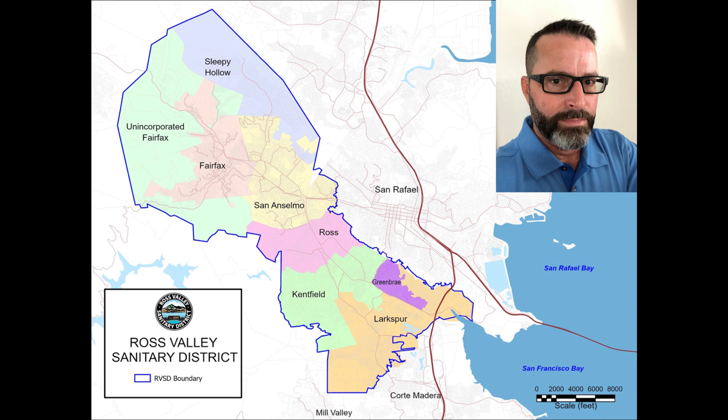It's crazy weather as it is, but nonetheless, I want to talk a little bit about our system. We have about 194 miles of gravity sewer, about 15,000 EDUs, and about 200 miles of private lateral.

We're not in charge of the private laterals, but we have enforcement programs that take care of that. Most of our pipe is 6 inches or smaller. We still have a series of 4-inch main line. About 73% of what we have is 6-inch, a lot of that's still VCP, but we're steadily moving towards upgrading and upsizing all that to 8-inch.

We have about 40% of our pipes in easements, and our terrain is challenging. We're in a valley with steep hills on both sides, and they've built homes right at the side of each mountain. So we have a lot of elevation changes, which makes both design and access quite difficult for the manholes and the pipes. Then we have about 5,200 manholes or rod holes. That's the makeup of our system.

Most of it was built 50-plus years ago, with still a large percentage that's 100 years old or older. We're one of the oldest sanitary districts in California, though not the oldest. I believe we were established in 1899, something like that.

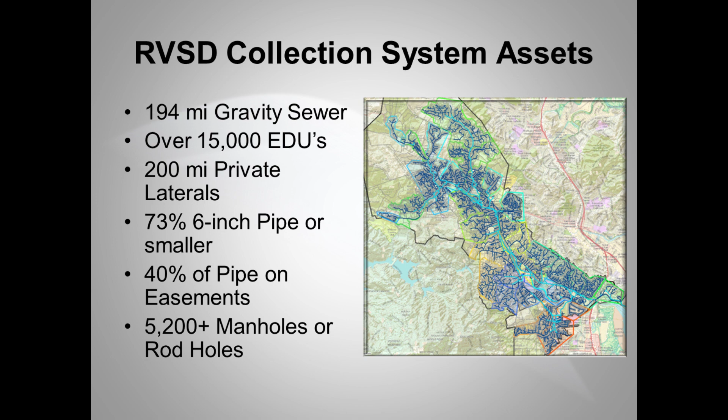Our story is, when I came to the district, we had quite a few challenges. For the longest time, the infrastructure was neglected. They weren't doing a lot other than fixing things as they came. It wasn't by design, but they were certainly running a run-to-fail model. This was adopted for most of our existence.

As things would break, you'd respond. We had crews going out doing night calls on a regular basis. We had problems in the pipes, the manholes, the pump stations, the lift stations—just about everything was falling apart at one point or another.

We have the badge of having some of the most overflows in Marin County, and probably in the North Bay area. Our count of overflows is up, our volume of overflows is up. We suffer from incredibly high I&I levels. Our factor on a normal storm is a factor of 10. On 100-year storms, we're at factors closer to 15, and even 20 in some of our basins. We're getting a lot of I&I coming into the system.

We had some management plans or design plans, but much was not being followed. None of our information was digital, it was all on paper. All of our maps were in books, and we would take stickers and move them from one place to another, depending on what kind of work we were trying to do in terms of O&M management or any type of work order tickets.

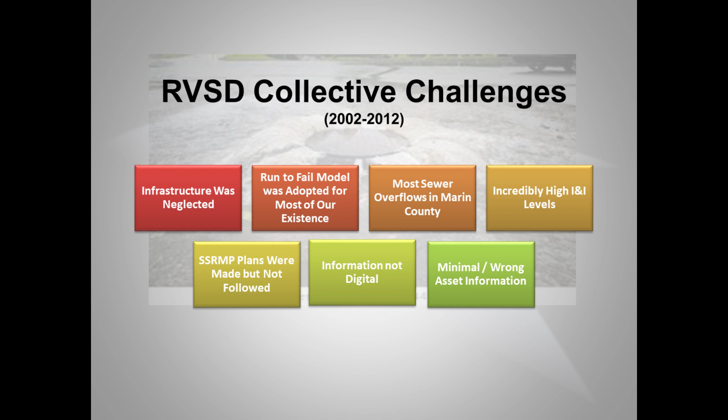When we would go do repair, it was based on gut—someone would say, I think we need to go fix this pipe because we've had a few SSOs in this pipe. This, of course, resulted in bigger problems.

This was a turning point in the district. We had a lot of attention—we made, I believe, national news for this, let alone regional news. We started to get a lot of attention on what the agency was doing, or in this case, not doing. This event was in 2010.

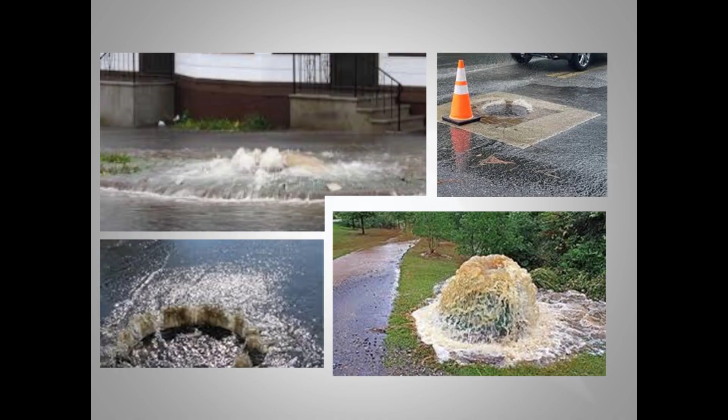I came in 2011 as part of a pack of workers that were brought in to help shore up not just technology, but to help develop how we were going to go about exploring and finding out where these problems were. And as the year continued, we wound up with quite a few more SSOs.

Or spills nowadays, we call them in California. Some are small, some are big, of various different sizes, and we had a lot of them.

So what we started to do, and the first step of any good program, is you have to know what you have. You have to know where it's at, where it lives, and what the condition is. And that's the big focus of today: our condition assessment program.

We started from scratch. We started televising the system. We started televising the manholes. We started recording information. We captured all that data, and we pushed that all out through the NASSCO system. We'll have some slides on that later.

But we use a coded standard so that we have the ability to measure one pipe from another year over year and get the same expected results. And that helps drive our capital planning.

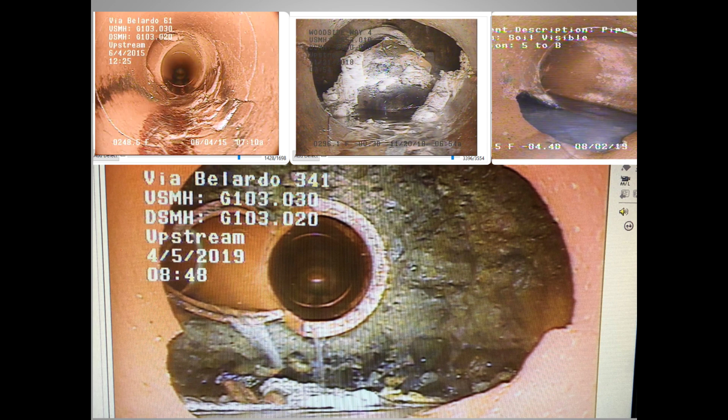About a third of those had some grade 5 level defect or another in those pipes. And they weren't just breaks like we saw in the top left-hand corner here. We had big gaps in our pipes. We had sections of pipes that were missing. We had connections that were broken. We struggled quite a bit with blockages and infrastructure.

There was also, at the same time, a big push by PG&E, our power company, to do cross-bore work, and they were boring water mains as well as gas lines through our system on a regular basis. The bottom left one was an electric, big 10 kV power line that was driven through our stuff. Not only did we not know where our assets were, they did not know where our assets were either, so they were just out performing work and they ran into us.

So we had several of these occasions. Lots of maintenance problems, lots of roots, lots of degradation of the system. We had collapses in the system. We had concrete peeling off the walls that was no longer adhering to the rebar anymore.

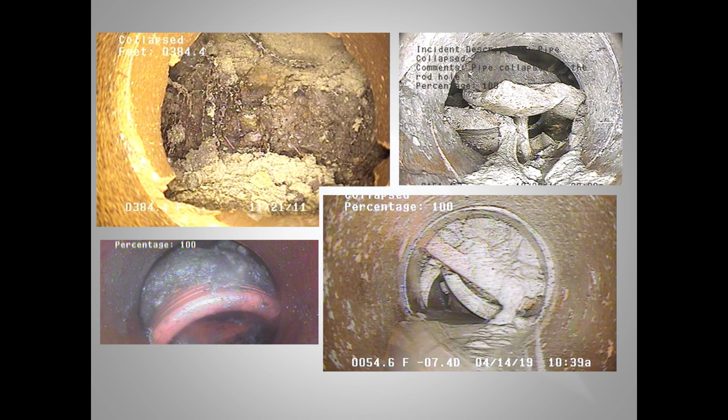And ultimately, what came of this... excuse me, my slide didn't advance. In 2013, we were visited by the Water Board, which is a state regulatory agency in the state of California. And they came and gave us a cease and desist order, which basically says it's time for you to start taking care of your system, otherwise the state would get involved and start managing the system for the agency. This is not a good look for any agency anywhere in the country.

But what this did is it forced the agency's hand. Now, in terms of my perspective, we were doing everything we could with the resources that we had. What we lacked was more resources to go out and take care of problems. We lacked capital funding. We lacked infrastructure funding. We lacked just maintenance and upgrade funding.

They had us running on a shoestring, and the board of directors simply refused to raise rates and address the problem because they wanted this region to be as affordable as it possibly could. Now, I agree with affordability, but the nearsightedness of this led to an agency that was unmanageable, unwieldy. We had way too many overflows, way too many problems with our system.

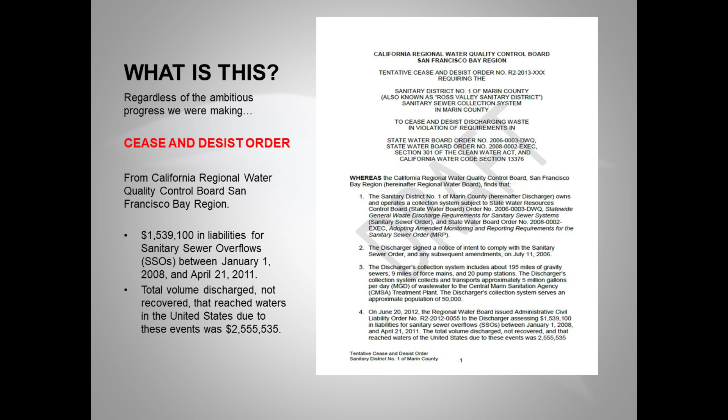And so they came and addressed that problem, and this forced the agency to start dealing with funding. It helped us really establish our asset management plan, or system, that we still use today. That starts with good inventory, and asset inventory is number one. You have to know what you have, where it's at, and then what the condition is.

From that, we can define what the levels of priorities are. We do that through an evaluation process. We use risk asset management, we use risk models. We have models for the pipes, we have models for the manholes, we have models for our vertical assets like our pump stations.

And we have everything put together in a manner where it becomes defendable. So when we develop a plan for rehabilitation and replacement, this also affects our regular day-to-day maintenance activities. We want to be able to defend our actions and activities so that when something fails, we can refer back to our plan and say, yep, we understand we missed one, but we had 3 other systems ahead of that were in much worse shape.

And this is the heart of good asset management: being able to understand where you're at and what you're trying to accomplish. And you have to present that in a way that ratepayers understand it, as well as the stakeholders and everybody involved. In this case, the Water Board is our biggest stakeholder that's involved.

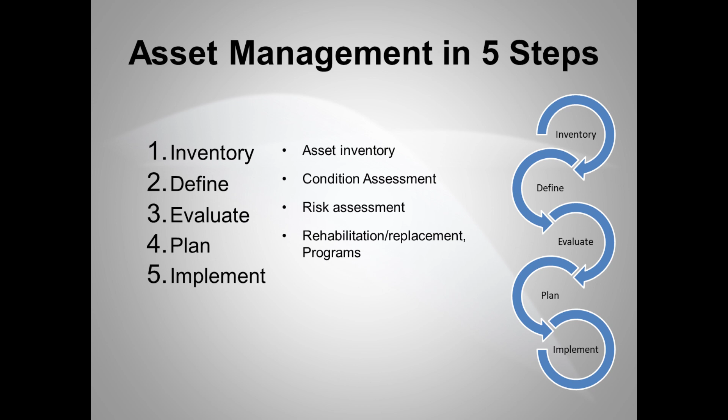And that has made a huge difference, and that has been fiscally responsible. We didn't obviously have that money, we had to raise rates. We bonded, and all that is done through good asset management and good program management in order to get us to this point.

We have quite a few lift stations that were bad, quite a few manholes that were bad. We had everything from brick falling out, full delamination of the concrete, rot - so we started inspecting our manholes as well. I think we just about have them all inspected now. We have 4,800 manholes and about 4,400 inspections in the system.

Some of the ones that aren't inspected are those real hard to get ones. We actually have some manholes that are under buildings or inside of buildings that you have to open the hatch door in someone's kitchen in order to get to. No joke - those still exist in our system.

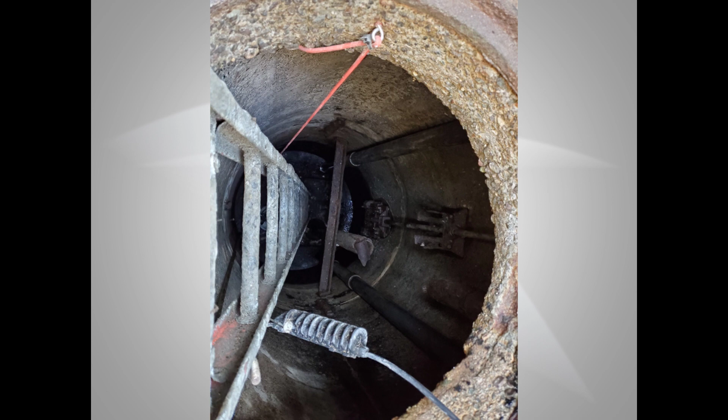But as we looked at the corrosion going on in our system, we started looking for methods and technologies to deal with this, because even though $100 million is a lot of money, it's not enough to do everything. We would need billions of dollars to replace everything that we have in our system. So we started looking for technology that gives us the biggest bang for the buck in our infrastructure rehabilitation. One of the systems that we found works really well for us in terms of increasing the life of existing lift stations and manholes is we coat them.

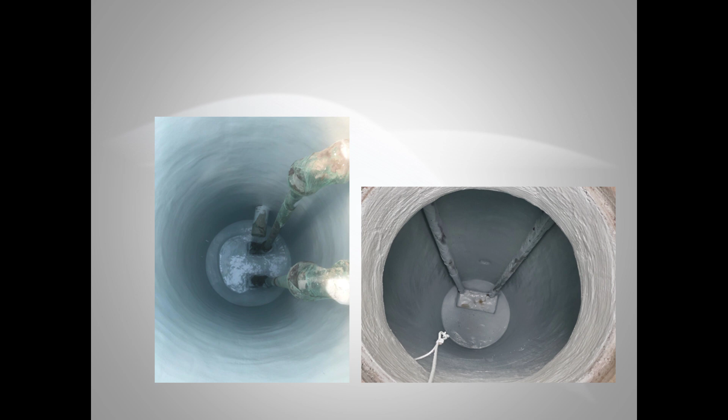We go in and have those sprayed, and we have the cementitious applied. We chose to go with an epoxy on top of it, which is why we like the Madewell product - we found that it outlasts everything that we do. We've done it all - we've done the insert liners, we've done just the cementitious by itself, and we find that the epoxy lining outlasts it by far.

There's about 150 manholes we're looking at now that have already been coated once with just cementitious, and we find that they're already starting to wear out again. This is in our low-lying areas that suffer from a lot of H2S damage, and we're going to have to go in, clean them up, and reline them again - but this time we'll come back with the epoxy on top, and we'll get the same life.

So we've got some assets that Horatio did for us years ago, and other than the staining on the walls, they look just as good today as they did the day we put them in. We see no evidence of that asset becoming an issue for us, and that's our goal.

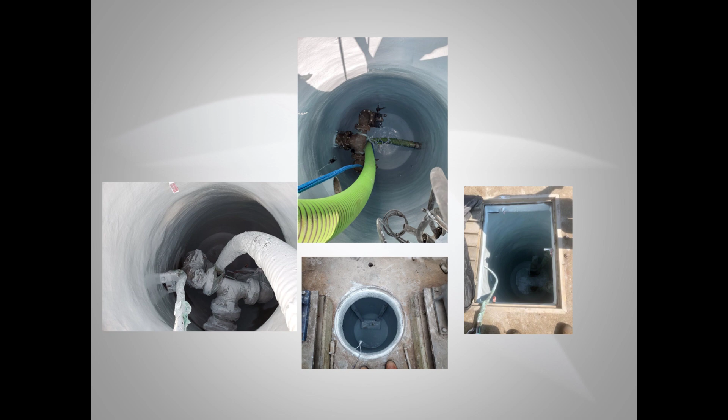When we look at any rehabilitation technology, whether we're doing outright replacement or just rehabbing the asset, we want to make sure it's the best bang for the buck, and it's the right decision for the ratepayers, because ultimately we're responsible to our ratepayers.

We don't play with our own money, we play with someone else's money. We talk a lot here about stewardship, which is the idea of taking care of somebody's stuff better than you take care of your own, and that really is our mantra. We want to make sure that the decisions we're making will outlast ourselves, so that when we leave it to the next generation, they not only know what they have, but they have something that's maintainable.

And we look at that investment in everything that we do, making sure that as we're investing ratepayer funds, we give them the level of service that they expect. We're all in the sewer business, we all understand what they expect: 24 hours a day, 365 days a year, when they flush the toilet, that is going to go away. When they take a shower, that water's going to go away, and it's going to be dealt with by us. That's our goal - without any interruption, without any issues.

Obviously, we're not perfect, and we still run into problems. But we'll talk more about that.

Where we're at today versus where we were at then. But now I'm going to take a break, and I'm going to turn this over to my good friend Horatio, who's going to talk a little bit about some of his experiences working with us.

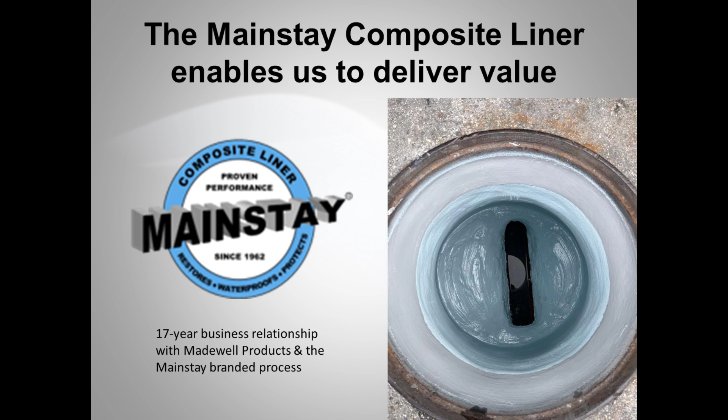When we decided that we wanted to do something other than just regular residential plumbing, we started looking into an asset, and I got interested in doing manhole rehab. So I did some research and visited company A, company B, and we decided to go with company M, Madewell. One of the things that really got my attention was that it was a company making all the products themselves and keeping everything in house.

We started 17 years ago, and it's something we're still doing, and the relationships we still build are working stronger than ever. Let me go back to this picture - we got a trailer like this, with all the equipment that we need to apply the products. As I mentioned, we got it about 17 years ago. It's a trailer that we still use today, and it still looks good and still works as it should.

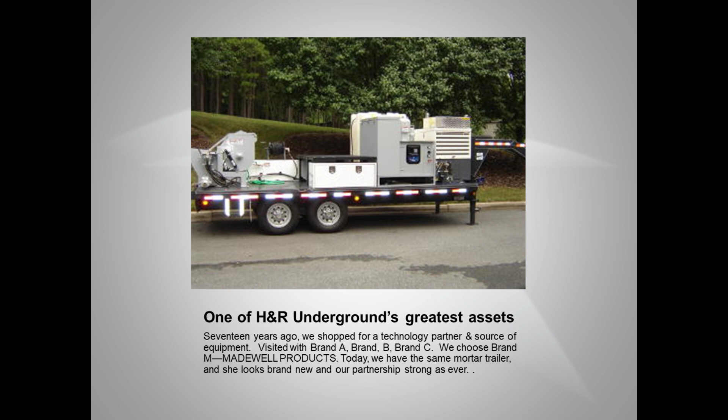Mainstay composite liner enables us to deliver value. I'm a hands-on contractor for 17 years. I know my people. I know Madewell products and equipment. I know the problems, and I know how to solve them.

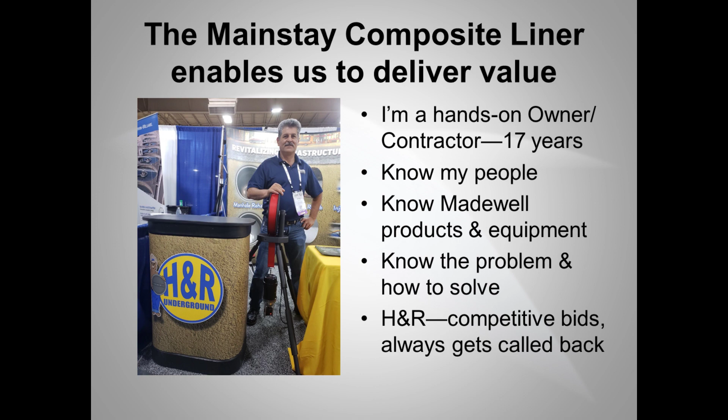H&R does competitive bids, and when we get them, we always get a call back to do more work in most of the cities. When we get to a manhole, every time that I open a manhole, every manhole is different. We got manholes from bricks, precast manholes. I have seen manholes where half of the manhole is precast, the other half is steel. I've seen manholes made of some type of liner, and I've seen manholes where there was nothing left, just soil in there. And I haven't seen a manhole that we haven't been able to rehab.

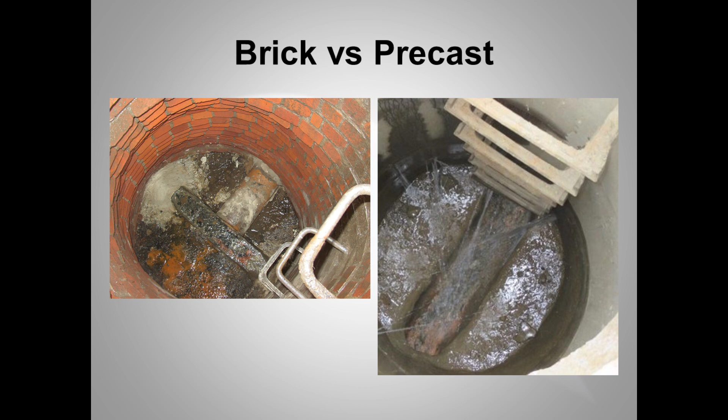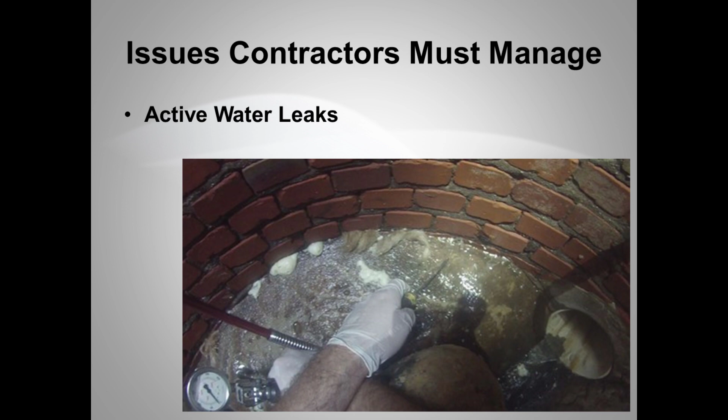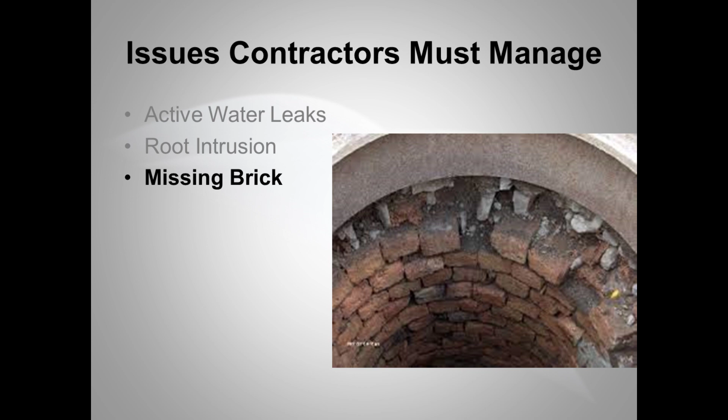The issues that we come across every time we try to rehab a manhole could be multiple issues. We find roots inside the manhole. We have infiltration. We have manholes that have been previously coated, and now the coating is failing. We find the rungs that we are taking off from every single manhole that we rehab.

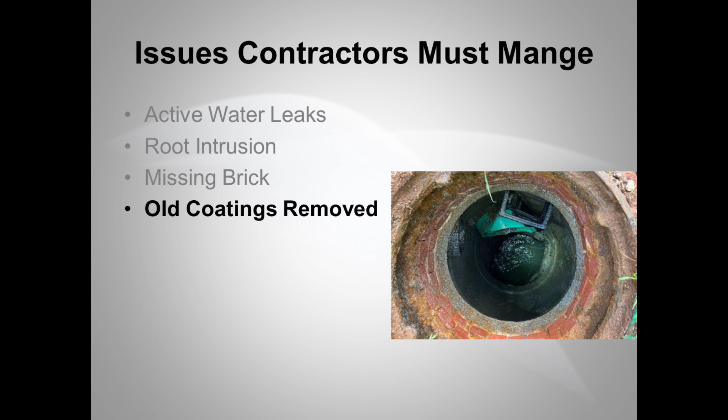Some of the issues we deal with prior to starting to rehab a manhole - we have a manhole that is leaking. Before we start any rehab, any prep, the prep requires stopping any infiltration. We stop infiltrations by a few methods, all depending on if we have a manhole that's a gusher or a dripper. We can either stop the infiltration using fast-setting hydraulic cement, or we can use grouting to stop the infiltration. So once the infiltration is 100% stopped, then we can proceed to the rehab.

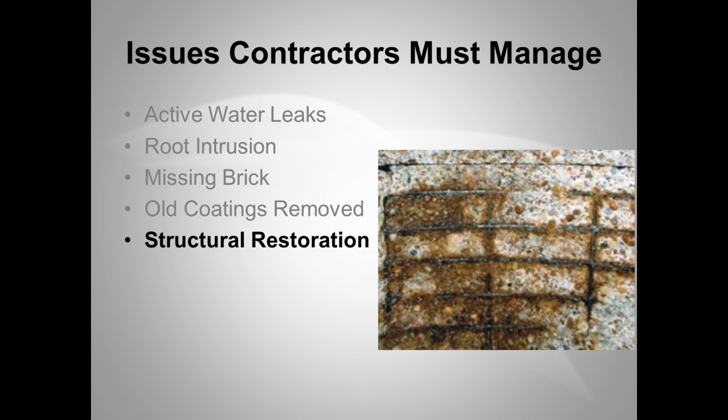We have issues where the deterioration goes beyond showing the aggregates, all the way to the wire or rebar. The way we approach this is we prime the metal - it could be rebar or it could be wires. So we prime it to prevent more deterioration prior to applying the rehabilitation to the manhole.

Once we restore the manhole, I like to say that every manhole looks the same once it's rehabbed. On the left-hand side, we have a manhole that is being rehabbed. We got the microsilica cement top coated with epoxy. We like that every manhole looks the same once we're done - no infiltration, no roots, and we cut the steps. On the right-hand side, we have a wet well.

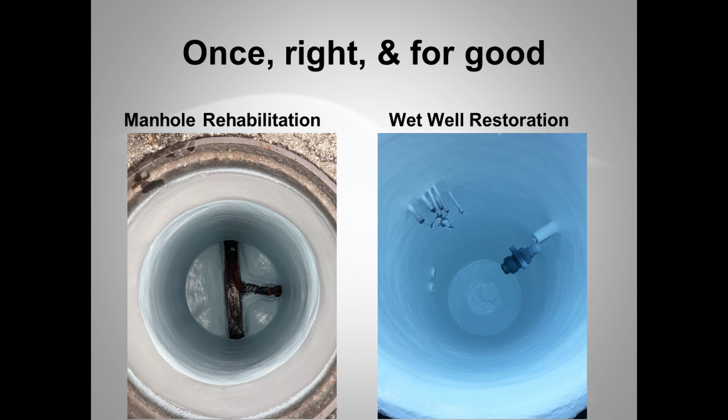The same way, we like to have every single well look the same. We coat from the floor all the way to the ceiling, every single corner. The way we prevent any overspraying is by taping off the pipes or any wires that might be there. And this time, I'd like to stop and recognize one of the mentors, one of the gentlemen who has shown me more about manhole coating than anybody else - John Steele, owner of Maywell.

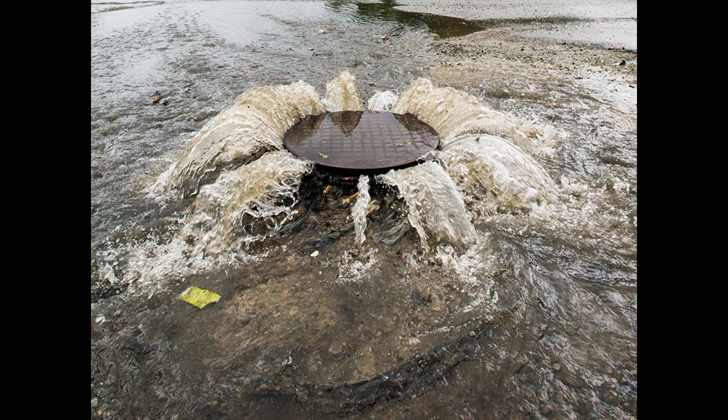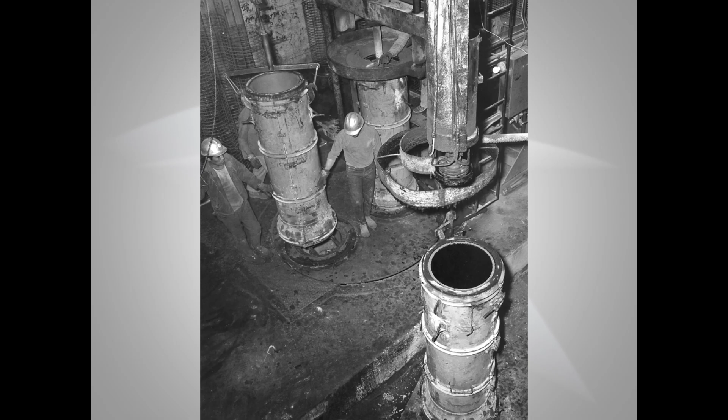They're starting to get this under control now. That's a good thing. Now I'm going to describe a little bit about what Horacio was just discussing regarding a composite liner and what exactly that means. Basically, a composite liner, by our definition, consists of a restoration layer, usually a cementitious material, followed by an epoxy top coat.

And these are done consecutively, one right after the other. We don't wait in between. Now, what you see before you here is a picture from the 1960s. U.S. Steel invented a process in the early 60s using epoxy, which had only really become commercially available within the 10 years or so before this.

And what they would do, this is in a concrete pipe manufacturer's plant. On the top, what they're doing is making concrete pipe, and then the two men to the left are moving this freshly manufactured piece of concrete pipe, and bringing it over to what they call a mainstay machine. Then they would spray a 125 mil layer of coal tar epoxy at that time on the inside of the concrete pipe, and then take the pipe away from our machine into a steam kiln and cure it overnight, and the next day it was hard as a rock.

There were some 50 million square feet of this done back in the 60s and 70s, but the concrete pipe industry sort of lost its way, and other materials became more popular. But my father purchased Mainstay from U.S. Steel back in the late 60s, and we have since converted it into a system that we use for restoring manholes, lift stations, wet wells, and that sort of thing.

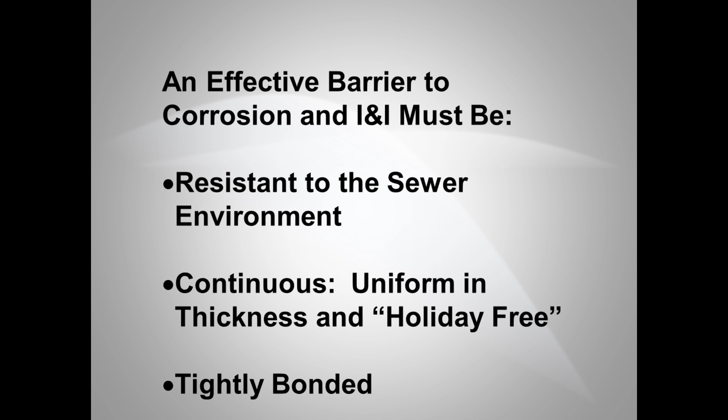In order for barriers to work properly, they have to be continuous. That means they have to be uniform in thickness, and free from any holes, or what painters call holidays. They also need to be tightly bonded.

The inside of a manhole and lift station is a pretty inhospitable environment for applying coatings. Some people in our industry apply epoxy coatings and other coatings directly to the substrate without any sort of surface underlayment, and that's just not the way we do it. I'll explain why our system works well in the next couple of slides.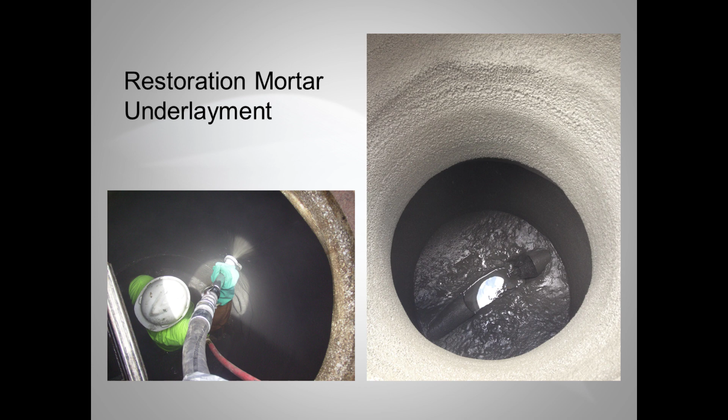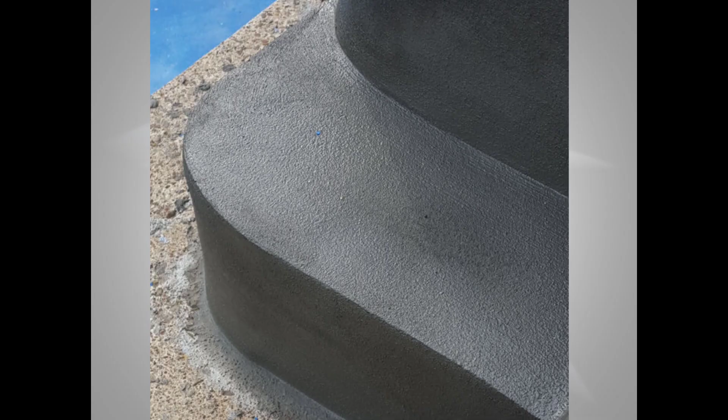Here you see a worker who's entered the manhole, and he's got a sponge in his hand. When you centrifugally apply the mortar, typically all you have to do is sponge it. If you apply it with a nozzle, typically you would knock it down with a trowel first and then sponge it. After this step, you have a very unique situation.

Now, this is not in a manhole. This is taken because it's hard to get good pictures of a finished mortar system in a manhole. But this is the sort of finish you're looking at when the mortar is complete. Now, if the manhole wasn't wet before you put the mortar on it, and they almost always are, you would wet the manhole first - I'll talk about surface preparation in a minute. But then after the mortar is applied and finished, you have a condition like you see in this picture, where you have a pristine, smooth surface that is ideally suited for the application of an epoxy top coat if you do it right away.

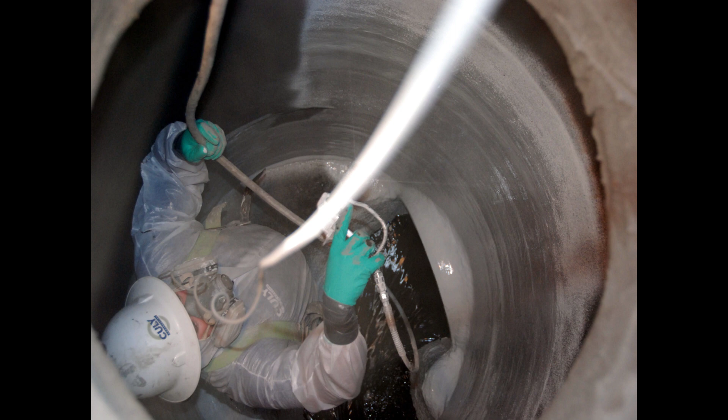And that's what they're doing in this next slide. They've just finished the mortar in this manhole maybe 20 or 30 minutes before this picture was taken. They enter the manhole and spray a 100% solids epoxy product. 100% solids means it doesn't contain any solvents, and it has essentially zero shrinkage, so wet film thickness equals dry film thickness. They're going to spray this corrosion barrier inside the manhole at 125 mils. We do spray it thicker in some cases, but if you have the restoration mortar underlayment, there's really not any need to go much above 125 mils.

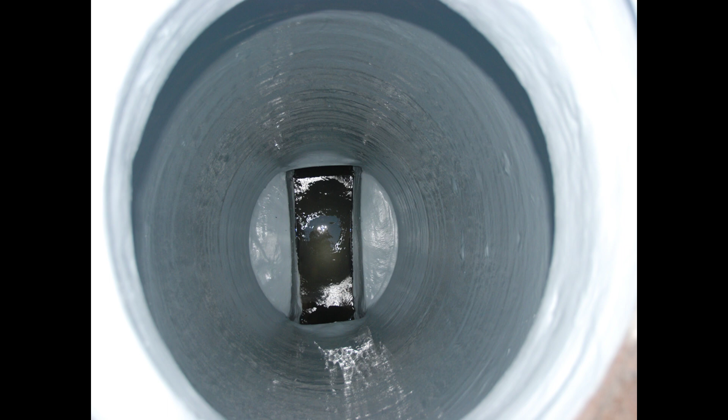And when you're done with all of that, you end up with a surface that looks like this. Now, there may be some inspection you would do after this point, for example holiday testing and adhesion testing, which I'll talk about in just a minute. But this provides a smooth, continuous, holiday-free, corrosion-resistant lining that should last for decades.

Forgive me here, but I'm not exactly sure who we're going to next - is it back to the editor or Don? It goes back to the editor. Okay, thanks John. And this is Mike again.

I just want to take a brief moment here and interject, because we've heard a lot of great things thus far. So let's recap what our experts have covered in the first half of this webinar. Sewer districts like Ross Valley in California have the ability to get proactive with maintenance and rehab work through condition assessment programs suitable for the community. Beyond brick or concrete construction, every manhole is unique, and these complex structures deserve periodic inspection and restoration to protect against structural decay and corrosion. And then from John, we learned an effective barrier to corrosion like epoxy must be resistant to the sewer environment, continuous and uniform in thickness, and tightly bonded to the surface.

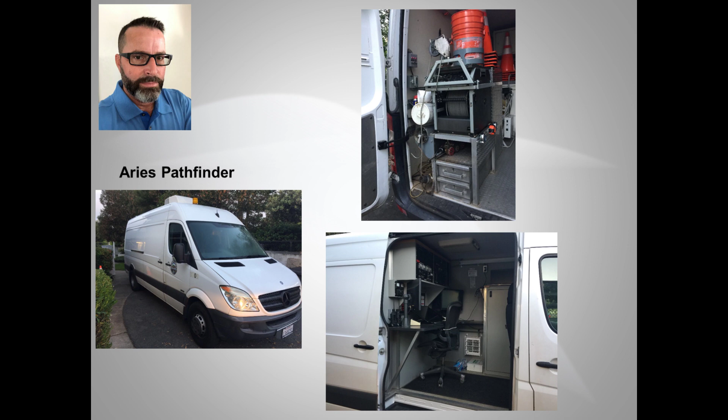familiarize everybody a little bit with how we got to where we are today. It started back in 2010 - we purchased an Aries Pathfinder TV van. Very simple in its operations, but very effective in what it gave us. It came with a push camera and a TV van suitable for televising pipes, and we started that process. For manholes at this point, we were still using just a surface visual look down - we would take some pictures. That was a little bit limiting, although it was very fast. We got a lot done.

It wasn't long after we started televising with the Pathfinder system that we realized we needed a little bit more for the manholes. We weren't quite getting an inspection down inside so we could see what was going underneath the rim, or some of our manholes are quite deep and we were having trouble seeing down there. So we invested in a pole camera.

These are quite common in the industry. There's several models out there. This happens to be the one we chose. We found that they were very detailed. We could actually get the camera down to the base of the manhole. We could look inside the inverts. We could look at the annular space if we were doing lining. We could look at what was going on with the structure of the manhole around the stairs or steps.

But what we found is it's slow. It takes a long time to fully visually inspect an entire manhole, and guys were missing big sections of it. They would get about half of the manhole, it seemed like, and that one place we always wanted to see when we were trying to determine rehabilitation or the severity of the I&I - I&I was a big driver for us, so we did a lot of this work during the wet season when we had water coming in - but the camera had a hard time focusing in on a big enough area that we could see what was going on.

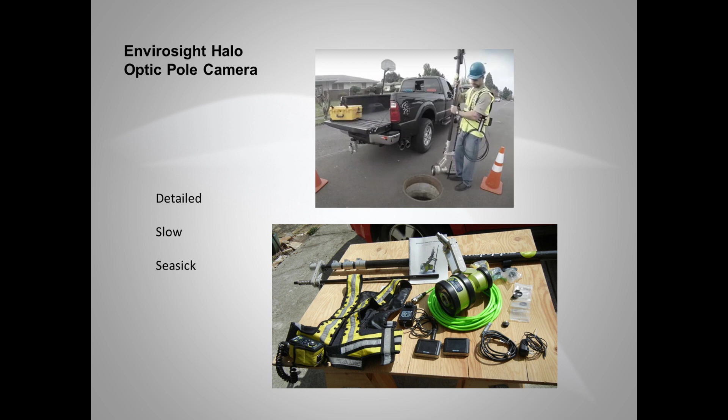So we moved and went back to surface inspections, but this time we added a little more technology to it. We were using iPhones to capture our video, and we tied that to a GIS system using an application called ArcGIS Field. That allowed us to go out into the field with a work order and capture some video, and gave the operators the opportunity to enter their defect codes right out there in the field. This way we weren't bringing uncompleted work back into the office for someone else to do - we let the operators do their job.

They went ahead and assessed the manholes and everything they could see, and they could zoom their cameras and control the lighting. This is a lot better these last few years than the cameras we first started with. We did this with about 1,200-ish manholes as we started to inspect, and this gave us a good swath of the state of the district, and they were all surface inspections.

Now, they're very fast - you can move through the system very quickly and gather information. But what we lacked again, and we saw this the first time with still photos, is you just lack detail. You can't see under the rim very well. A lot of our manholes are not concentric, they're eccentric, and anything under the shadow of light is really hard to see. It's hard to see the cracks, the breaks, even to the point where they're deep enough you can't see the base, which a lot of our manholes still have brick bases. We weren't able to see where we were missing bricks, or where the mortar was starting to come out, or the concrete was starting to degrade in these manholes as we looked.

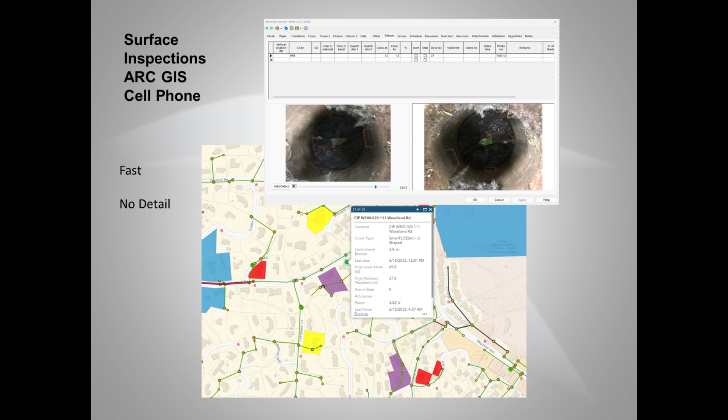So then, about 2 years ago, we invested in an IBAK system. We purchased a system that could accomplish both CCTV as well as Panoramo and Panoramo SI, which is 3D imaging technology for both the pipes and the manholes. We also invested in a 3D measurement tool that allows us to measure the manholes as well as the pipes for diameter, length and height, and also their curvilinear position in the ground. We incorporate that now with our GIS.

We take GPS sticks out in the field and capture where those locations are at. That helps drive better information to our now digital maps. So the days of paper for us are all gone, and the days of paper work orders are all gone. All that's driven out digitally through our CMMS system.

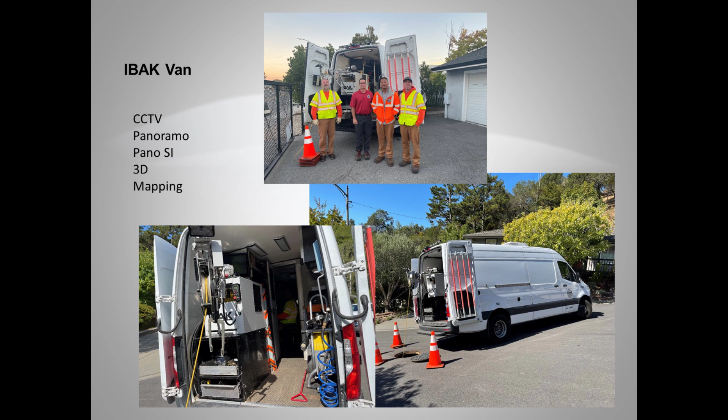We take this information now, and what's unique about the Pano is it's fast. We can inspect most manholes, not counting setup time, in about 5 minutes. The equipment goes down, it performs a scan, and you pull the machine out.

We do it both ways. I have the operator code the information in the field, and/or we accumulate a bunch of work and bring it back to the office and code it there. We do that based on traffic control scenarios. This equipment allows us to go out into the field and get a lot of information very quickly, very fast. It's very detailed.

We can control the full inspection. We can see the entire manhole from inside the office and make better decisions on what kind of rehabilitation efforts we're addressing, whether it be I&I or just structural degradation, and it's safe.

One of the key components we look at is making sure the tasks we're asking our operators to do are as safe as they can be. This gives us a full level 2 inspection because we get top to bottom, but a person never breaks the plane. It's all equipment based, all machine based, so the machine goes down and does all the hazardous work for us. The operators are just standing at the top of the manhole deploying equipment, and it's great for them and great for the equipment.

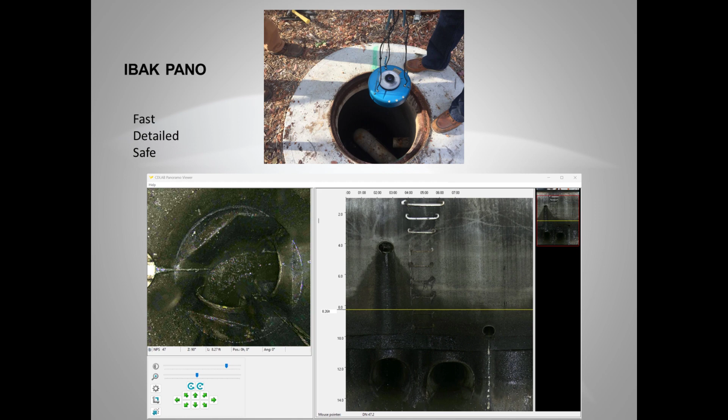Every year now we put a percentage of our capital budget to fixing these manholes, which addresses two issues: we take care of the structural side that's failing, as well as the I&I that's coming in. And I'm proud to say that we do everything NASSCO. The PACP system is just a great system across the board.

We dump everything into our CMMS.

I maybe talked over my slides a little bit, guys.

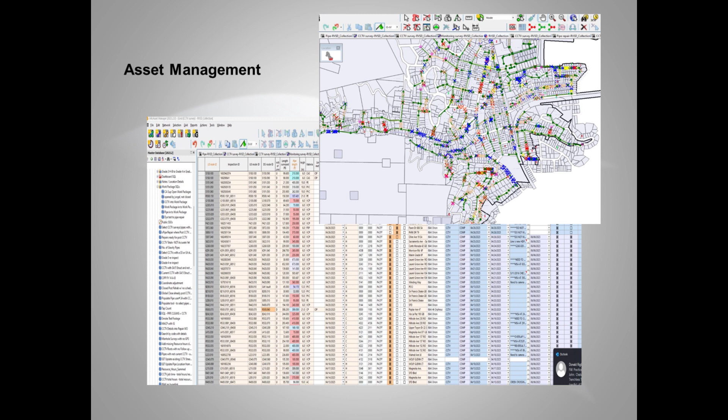Everything is digitized in terms of what we're bringing into the information. It's all applied to risk models now.

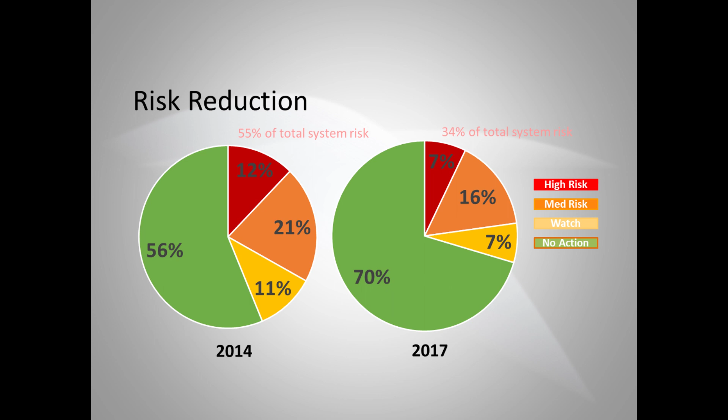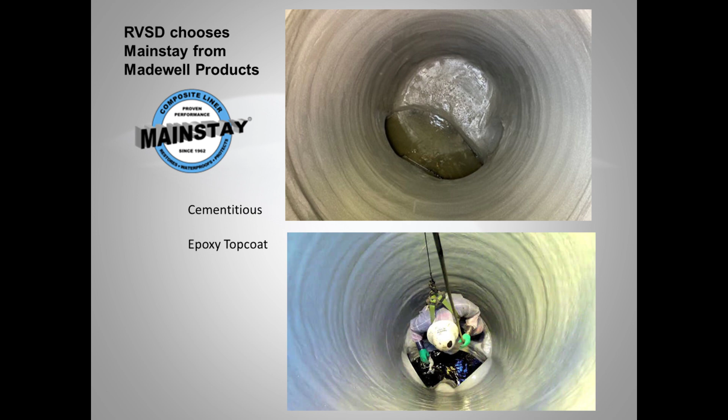We deal with risk reduction in how our model works, and we like to deal with the highest risk stuff first, and we work ourselves to the lowest risk so we have a manageable system. Of course, we're using Madewell products. We love the product, and we're big fans of prep. We prep our manholes to get them ready to go. If a manhole's a little bit on the edge, we'll do a scratch test or a penetration test to make sure it's just not too far gone. Let's face it, sometimes you get into an asset and you just can't rehabilitate it. So we do that test to make sure it's a good candidate for rehabilitation, and then we rehabilitate.

We've pumped all kinds of money into our capital system, but we've done it intelligently. We don't do anything by gut anymore. We have our in-house point repair program, we have capital programs, and we are dealing with issues as we get through the system. We no longer leave things for the next generation. We are fixing them today, and we're making our system better.

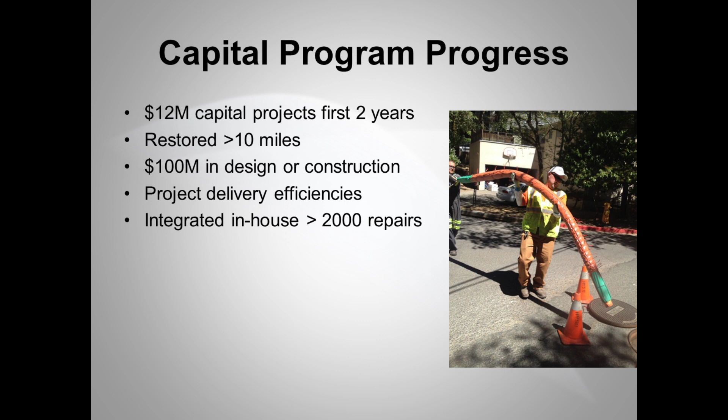I'm proud to say that last year, California saw record rains in our region. I mean record, like they never predicted how much water we would see. And we had not one capacity SSO during that period of time, and that is saying something. Back in the past, that would have been a catastrophe. But because of the efforts we're putting into our system, because of the I&I we're addressing, and the structural issues we're addressing, our system is performing the way it's supposed to. Doesn't mean we don't get nervous and don't come close, but we are so much better in control today because of condition assessment and our active rehabilitation.

And I'm even more proud to say that last year, the 2022 year, we won the California Collection System of the Year in the state of California. This is a big award for our size of agency, and we are so proud that we were able to achieve the standard that our association measures against. It's a peer review, so we had peers from other agencies come out and evaluate us and look at all of our information, all the things we've been doing. And that is how you get to where you're supposed to be. So we're super proud of that, super excited for what is coming in the future, and we're going to continue driving forward to leave our system better than it was when we found it.

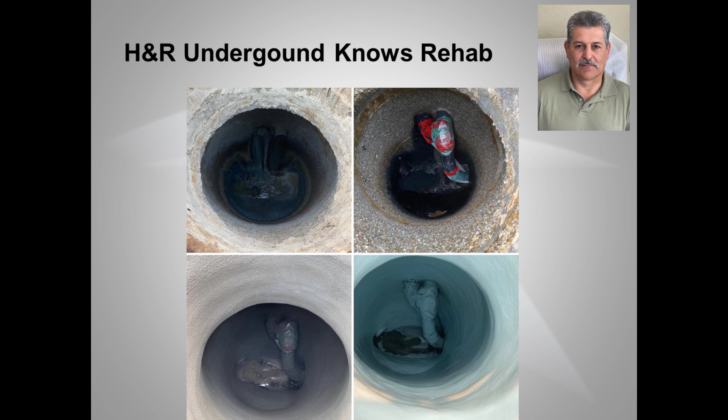As you can see in the upper left-hand corner, there was deterioration. In the upper right-hand corner, after we prepped with hydroblast and got to the aggregates, we lost about 2 inches in the process of prepping, so we had to add back at least 2 inches. In the bottom left corner, after we applied the microsilica cement, and the bottom right, we applied the epoxy on it. So for these wet wells, the lift station at Ross Valley, we did 8.

There was a project that was kind of unique for us and interesting, we had to run a bypass. We had to supervise the bypass 24/7, making sure there was no overflows, making sure the pump had enough fuel, and the pump was working properly.

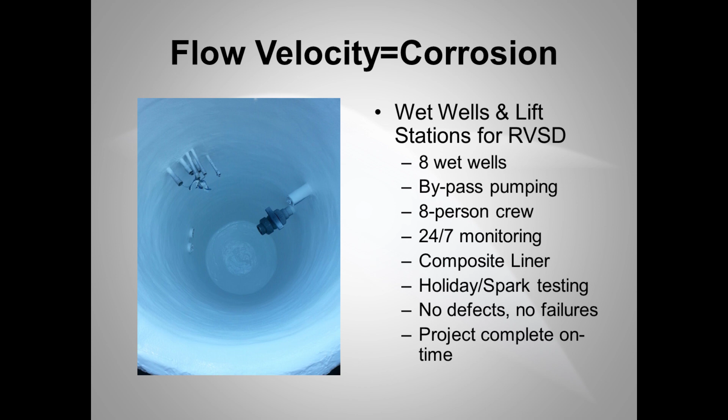We completed this project with 8 technicians in 12 days. By the time we were done, we did a holiday test on every single one to make sure we had no pinholes and no defects on the coating. By the time we were done, we found no defects, the coating came out good, and the project came in on time and on budget. I was kind of proud of the crew that spent the time on every single lift station.

Part of our company, some of the things we emphasize a lot are safety and training. We run our traffic control and confined space entry, and we train the guys. Every single crew has been trained on confined space entry, how to use every single piece of equipment for confined space, from the blower to blow air and ventilate the manhole, to the tripod, to the gas monitors. Every single technician has a high visibility uniform, since we're on the road all day long, so we want to have high visibility on the road.

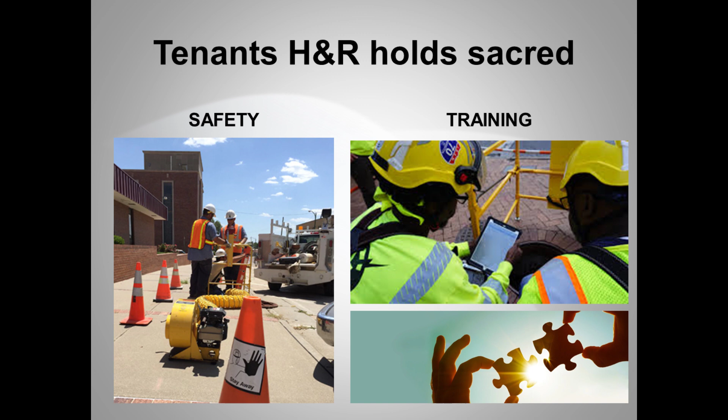We travel anywhere that there's a project that needs to be done. Today the crew is working in a city close to Fresno, about 4 hours away from us driving. So the crew's down there, he's staying down there. With this, I'd like to thank all of you for being here, for attending, and we'll pass on to John Steele.

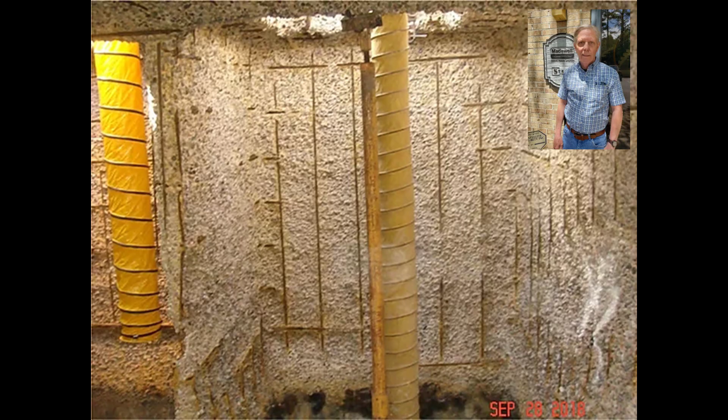Okay, well folks, Horacio had a slide that said velocity equals corrosion. As far as microbiologically influenced corrosion is concerned, age also affects the corrosivity of sewage.

So this isn't a manhole, this is actually an intake structure in a sewage treatment plant here in the Atlanta area. As sewage leaves from residential areas to lift stations into collection systems, and further down the line, it becomes more and more corrosive. Especially in a place like Ross Valley that has lots of changes in elevation, you have a lot of turbulence, and a lot of problems with corrosion.

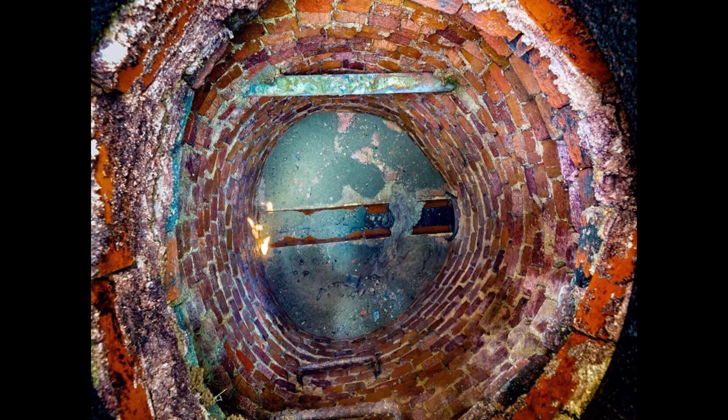If you look at this brick manhole, this picture was actually provided to me by John Vogel. This is apparently a manhole out in his collection system, and as you can see, it's in pretty bad shape.

As we talked about earlier, our process is to apply a cementitious underlayment first and then an epoxy coating. The reason why is because this structure is so rough and uneven that it would be almost impossible, or very difficult, to apply an epoxy coating by itself and get it continuous and holiday free.

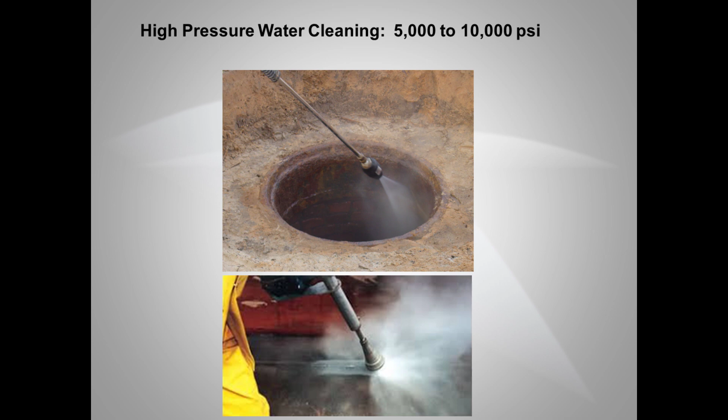So I'm just going to touch on a couple of the things we do. We train our certified applicators in the use of our equipment, but we also train them in issues like surface preparation, adhesion testing, holiday testing, film thickness control, and all those various things.

Starting with the very first one, surface preparation is key. SSPC and NACE have now combined, but they had a joint standard, SSPC 13 NACE 6, which called for various methods of preparing surfaces. One of them is high pressure water cleaning, defined by the standards as being between 5,000 to 10,000 psi. Our contractors typically do this at the lower end of that scale, about 5,000 psi.

The picture on top shows a 0 degree tip that's rotating, and at 5,000 psi it's pretty strong. The picture below that is ultra high pressure water blasting, with pressures above 10,000 psi, which are just not really suitable for use inside a manhole.

The idea is that when you're done with this, you're going to have a surface that has no dirt, no loose material on it, and it should be down to a sound substrate. And if it's not, we're going to have to keep cleaning until we get there.

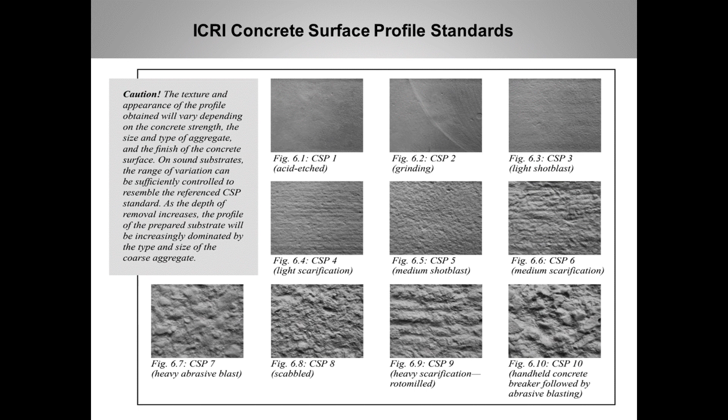The International Concrete Repair Institute has a method for identifying concrete surface profiles, and you can see there's acid etching, grinding, and so forth. Most of the surface profile that we would end up with would be a CSP 6 or greater, and that's one of the things, for example, that we teach our installers.

We also teach our installers about adhesion testing. There's many different ways to perform adhesion testing, and in fact at the end of this program you're going to see that we have a technical bulletin that we've issued on the subject. There's a lot of different standards to be considered.

If you look at this particular picture on top, that's an actual picture out of ASTM D7234. When we're done installing our epoxy and our mortar, it should be bonded to the concrete or brick substrate tightly enough that if we pull off a dolly like you see in the illustration at the top, it should actually pull the epoxy, the mortar, and probably some or quite a bit of the underlying substrate.

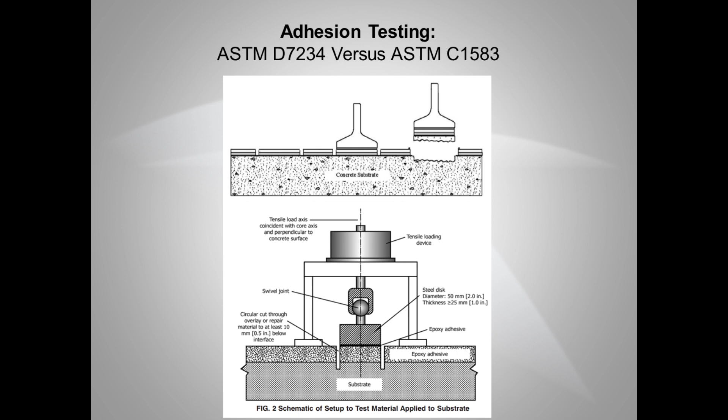If you were one of our applicators and came to one of our classes, we would teach you all about these standards, about how adhesion testing is performed. It's a force versus area relationship, and there are lots of different types of equipment that can be used to test. Results from one test don't necessarily correspond with results from another, so we teach our applicators about how that's done. We also teach them how to control film thicknesses for both mortar and coating, and how to holiday test those linings to make sure they're holiday free.